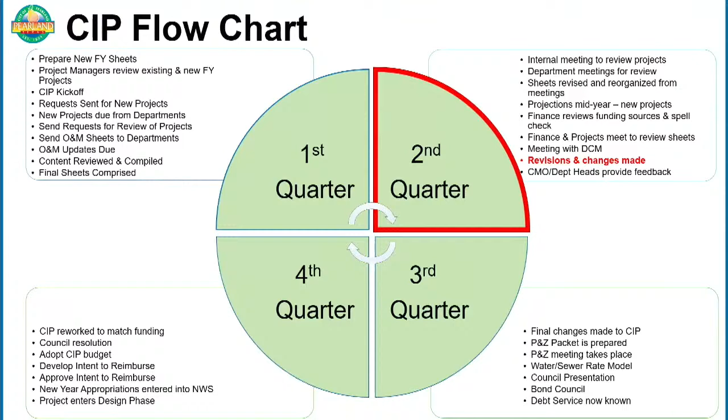So again, this is the first CIP update series for transportation and drainage for calendar year 25, which will follow with the CIP workshop. And then the next CIP update series will be over parks and facilities. At this time, I'll turn the presentation over to Rachel Winslow, head of the Office of Management and Budget, to talk about CIP budget approval and associated impacts.

Thank you. Good afternoon, Mayor and Council. So our annual CIP approval process begins with CIP approval, which was on September 9th. And this approved the projects for the current fiscal year. On October 14th, the intent to reimburse for fiscal year 25 was approved. This approves expenditures up to the amount shown for fiscal year 25, but individual contracts are still approved by Council.

In May of 2025, we'll have our fiscal year 2025 debt sold, which will impact the fiscal year 2026 debt rate. At the time of the debt sale, we'll be presenting an updated debt impact, and we will present an additional one at the CIP workshop in June. Changes made to the fiscal year 26 capital improvement plan will impact the fiscal year 27 debt rate.

Our O&M costs are built into CIP projects and included in the budget year of initial operation. Operational costs are considered in the multi-year budget forecast as well as the rate model.

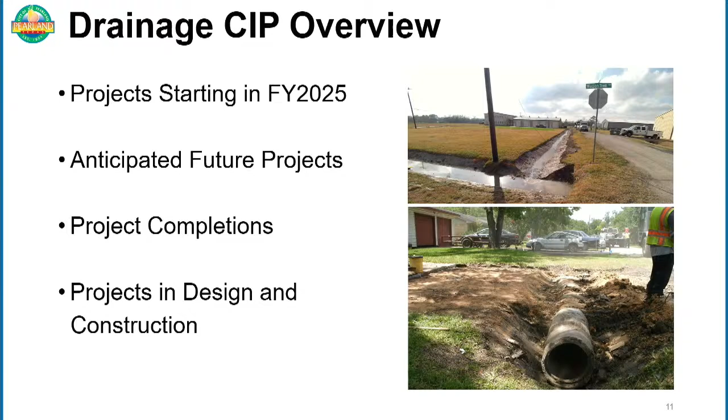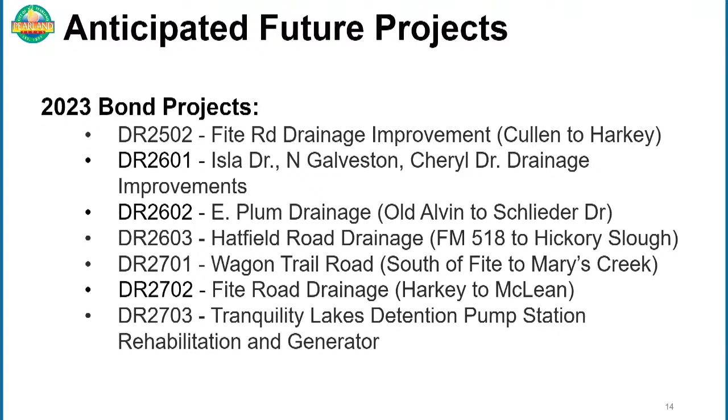From the anticipated future projects, I would like to highlight the Fite Road Drainage Improvement Project, with limits of work from Cullen Parkway to Harkey Road. Although this project has funding approved for fiscal year 25 to start design, we cannot construct it until TxDOT addresses the drainage issues on FM 1128. Otherwise, the drainage intent of this project will not work due to potential bottleneck downstream.

Currently, TxDOT has an active project to widen FM 1128 to include drainage improvements from FM 518 to Mary's Creek. The design is in its early stages, but we have been coordinating closely with TxDOT. Once TxDOT completes their drainage improvements, this project's scope can be reduced, significantly lowering the cost of the Fite Road project for the city.

Still on anticipated future projects, I would like to highlight the Isla Drive, North Galveston, Cheryl Drive drainage improvements. This project will include the removal of the existing concrete road, asphalt roadway pavement, roadside ditches, and replacement with the city standard concrete curb and gutter roadway with underground storm sewers.

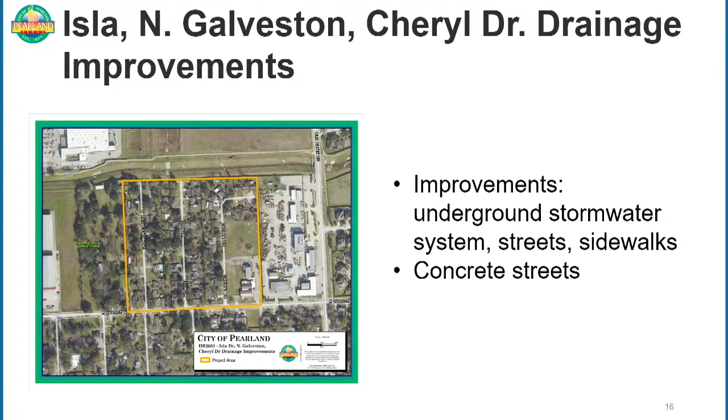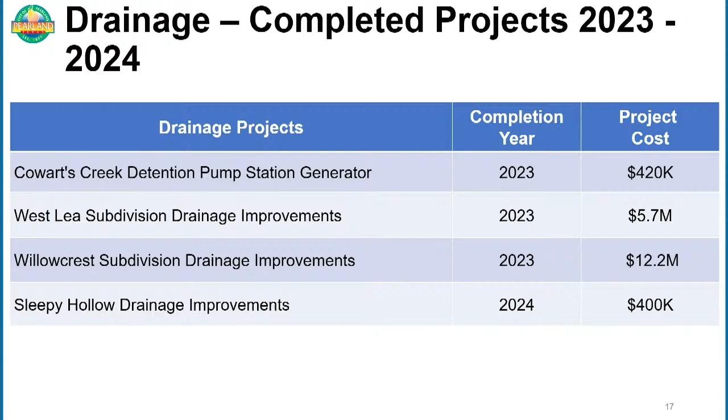Here's one project I would like to highlight, the Cowart's Creek Detention Pump Station Generator, which was completed within budget in 2023.

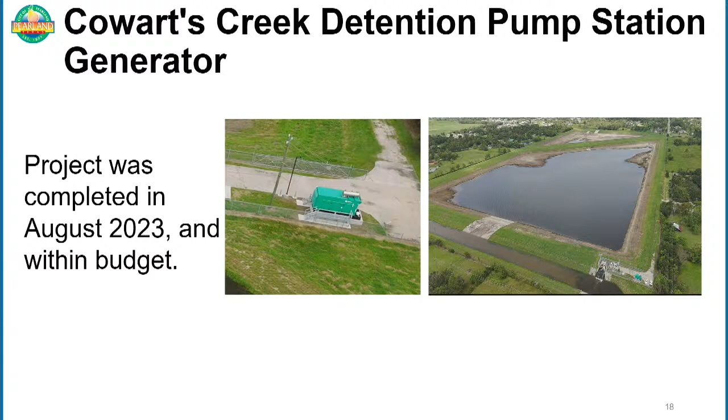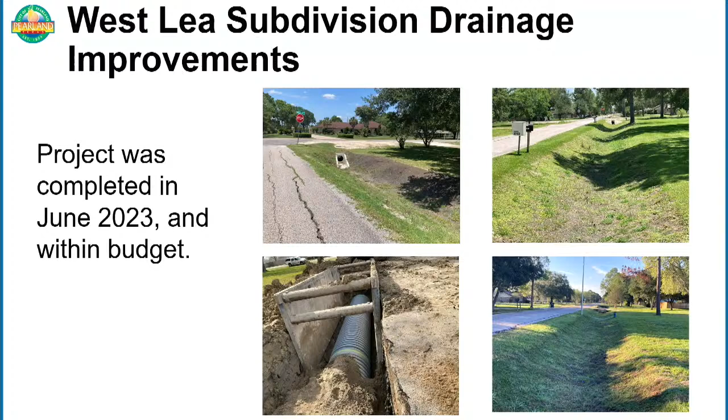Another project to highlight is the West Lea Subdivision Drainage Improvements, which was completed in mid-2023 and on budget. Council, as you are aware, the city is planning on addressing the roadway needs in this subdivision this year. Here are some pictures during and after construction of the drainage project.

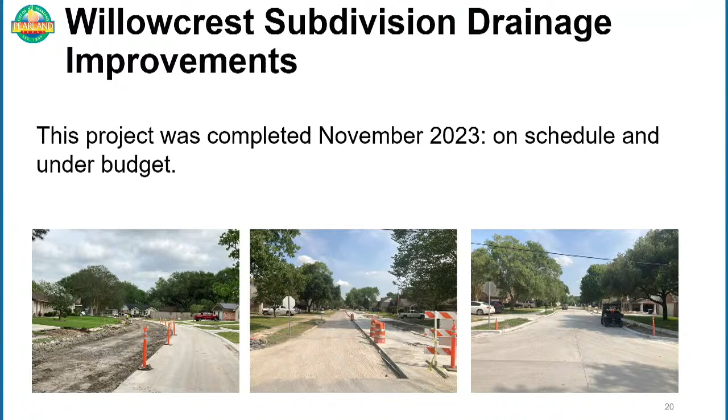Here's another project completed at the end of 2023, on schedule and on budget. And here are some pictures during and after construction.

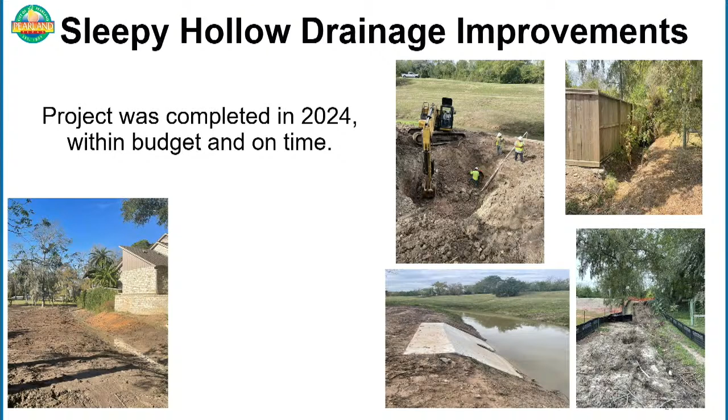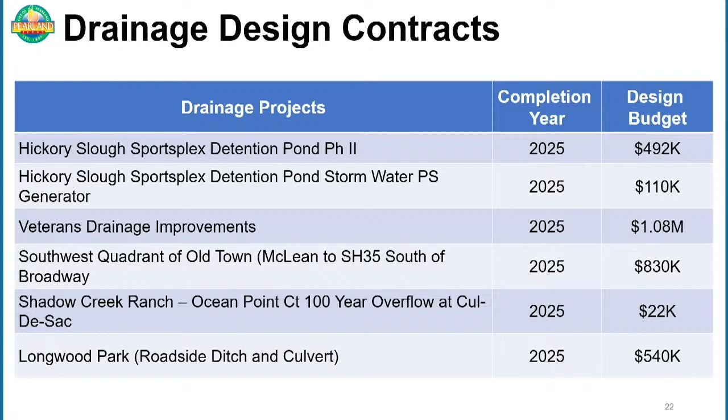Some of these projects have been combined with others to better allocate resources by designing and constructing together, minimizing impact to residents. By doing this, we are in and out of a neighborhood at the same time, as opposed to having separate projects constructed separately and inconveniencing residents multiple times. For example, the Hickory Slough Sportsplex Detention Pond Phase 2 and the Hickory Slough Sportsplex Detention Pond Stormwater Pump Station Generator were combined with the Hickory Slough Sportsplex Phase 2 Parks Project.

Out of the projects currently under design, I would like to highlight the southwest quadrant of Old Town drainage improvements, which will include regrading of the roadside ditches and road pavement improvements. This is one of the projects I mentioned earlier that was combined with other projects to better allocate resources and minimize inconveniences to residents. This one was combined with the water line project.

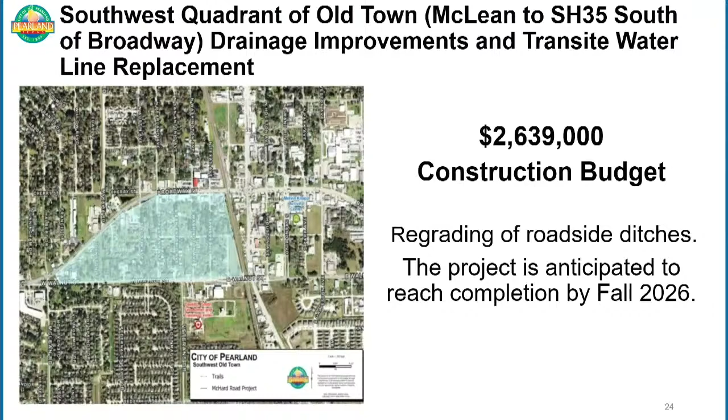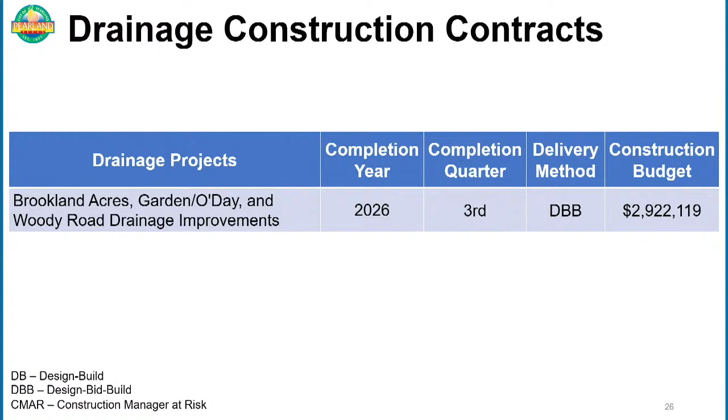We currently have a few projects in construction. These projects also have been combined into one, as you see here on the screen. These are funded by GLO. These projects are estimated to have construction complete in August of this year.

As I mentioned, this is another GLO grant funding project. Construction is going well so far.

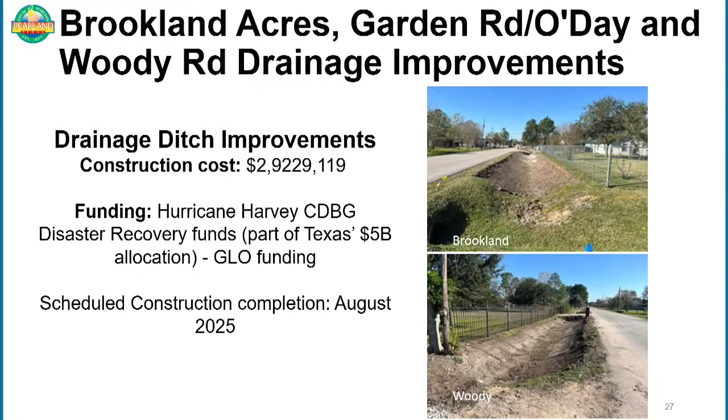At this time, I will pass the presentation over to Mr. Eric Heyman, Assistant Director of Public Works. Good afternoon, Mayor and Council, and thank you for another opportunity to highlight our drainage maintenance program since the last time we had this discussion.

As a quick reminder of why drainage maintenance is important, we see that impacted storm sewers could lead to downstream flooding, property damage, habitat loss, sanitary sewer overflows, contamination, as well as erosion. However, through routine and targeted maintenance activities, as well as our capital improvement projects, we believe that we can reduce the impacts of flooding within our community.

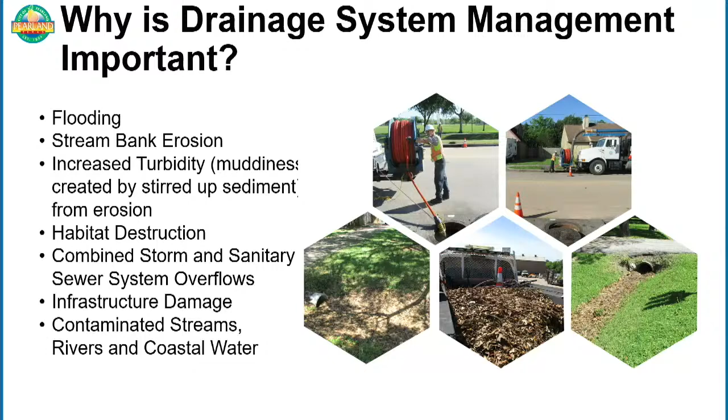And we have over 13,800 inlets. Each of these is a critical asset. It can also be a point of failure. It can also be a location for debris and sedimentation to obstruct and cause issues to our flow.

The team continues to inventory the drainage infrastructure throughout our program. Since we commenced in April of '23, based on ongoing inventory activities, we've increased our open ditch system inventory by 7.5%, and we've increased our enclosed system by 16%. So we continue to watch the asset grow.

In addition to the assets we previously highlighted, the city currently maintains 110 FEMA buyout lots. We inspect over 300 detention facilities comprised of both private and public ownership, provide grounds maintenance activities to 750 acres of drainage and buyout property, and as well provide all the emergency response support as it relates to the drainage activities.

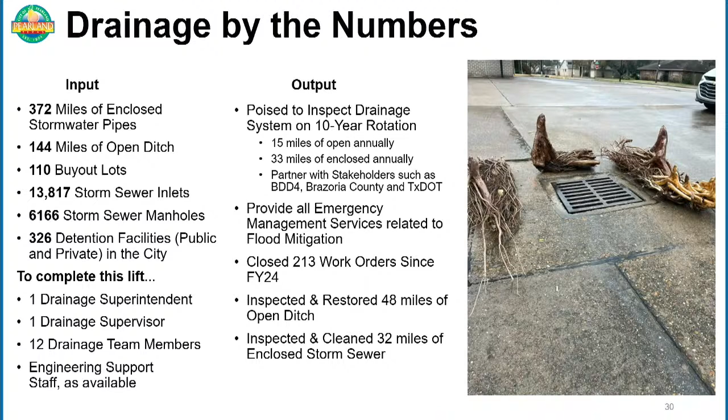Prior to fiscal year 23, we merged the right-of-way and streets and drainage division into a single division. In total, only 6 employees, inclusive of the supervisor, were assigned to drainage-related services.

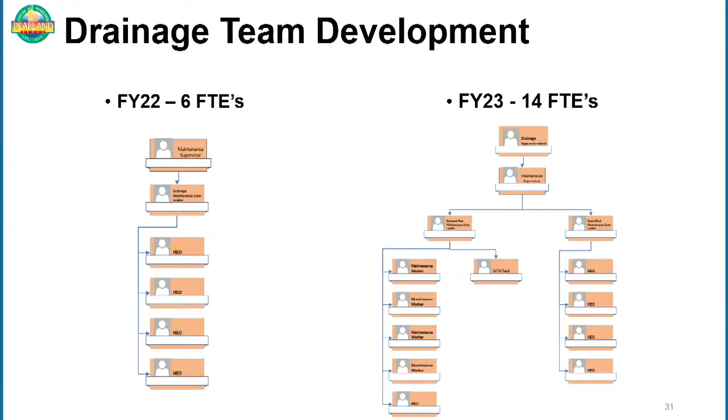However, in response to a need for increased drainage activities, council supported a recommendation to increase staffing levels and develop a new standalone drainage team, along with all of the critical assets and equipment necessary to ramp up this service. That support includes the addition of 7 drainage team members, bringing our current staff total to 12, as well as a superintendent and a supervisor to focus on leading that charge and helping coach, mentor, and direct staff.

The result of the program-based approach and desire to advance systematically throughout the community: staff proposed to inspect, clean, and reestablish flow lines as necessary on a 10-year basis. Year 1 commenced in Zone A with the team working counterclockwise throughout the community. While there remains some residual work to complete in the first zones, the team is working to bring those areas to conclusion with both in-house and contractual services.

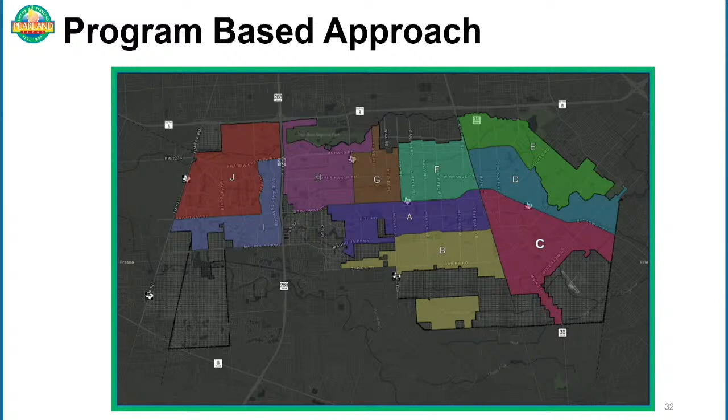Moreover, they show that new and aged infrastructure are both impacted by sedimentation, which is why it's important to have this program-based approach. To paint a full picture of the work that occurs, staff first visit an area and ensure design flow lines have been maintained based on culvert elevations.

In some cases, we do have very quick wins. In other cases, there are larger, heavier lifts that require a little bit of additional staff time to complete and do a good job.

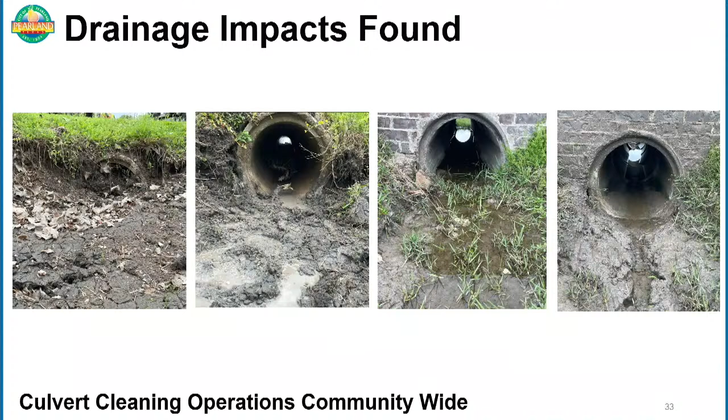Another example of this critical service includes the cleaning of our storm sewer manholes. We shared previously an asset inventory, and there are approximately 6,166 of these storm sewer manholes within our network.

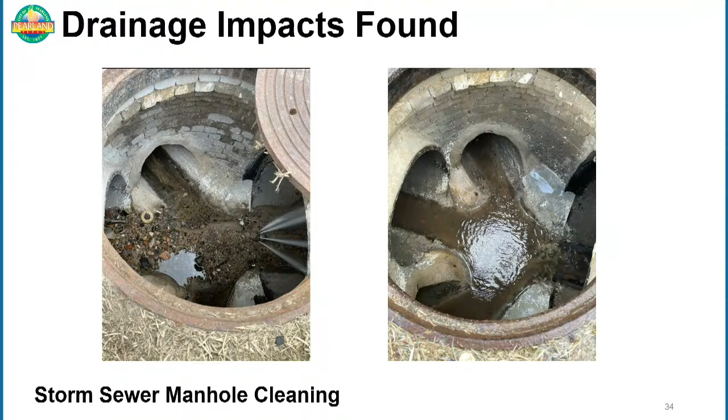Each of these serves as a point of entry for staff, as well as a point of accumulation for debris as it enters the inlets, moves throughout the pipes, and then congregates around obstructions where these flows meet. So they often require jetting by the staff, vacuuming, and at times personnel to enter these manholes and physically remove this debris by hand, as you see here.

Upon staff arrival, the team identified that we had localized flooding. The inlets were found to be clear and free of debris, but upon inspection, the outfall behind those homes had minimal water movement through the piping system, which led staff to determine that we had an obstruction. We dispatched our combination cleaner truck to come out and jet the lines, and on a blue sky day, much like we have today, we're able to go back out and dispatch our CCTV camera to see what was actually causing the obstruction.

Was it a sports ball? Was it leaf litter, old newspaper, or just an accumulation of 50 years of debris from within this community? We're excited to get that camera in there and see what's really causing the issues.

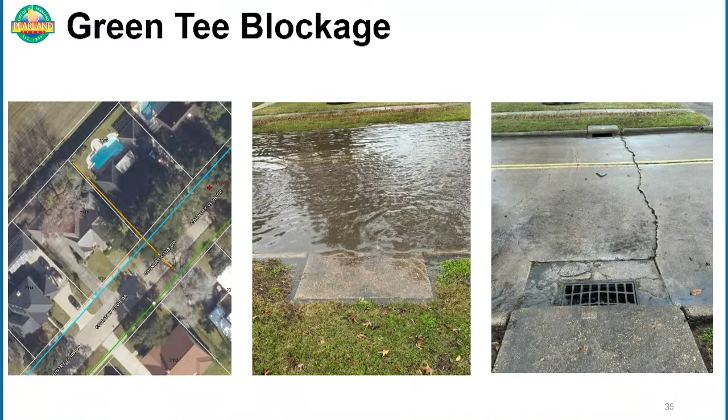To reduce impacts to our residents and coordinate work activities, our street team and drainage team often work hand in glove. In this instance, Garden Road was being repaved, and upon inspection of the storm sewer near the roadway, it was determined that an existing metal storm pipe was found to be in disrepair, causing subsequent failure to the road.

While we don't know exactly when that metal pipe was installed underneath the street, we do have imagery dating back to 1978 indicating that the drainage system intersected where this culvert was located.

So the drainage team removed the old aged infrastructure, installed new infrastructure which meets our design criteria, and prepped the road for rehabilitation, which has since occurred.

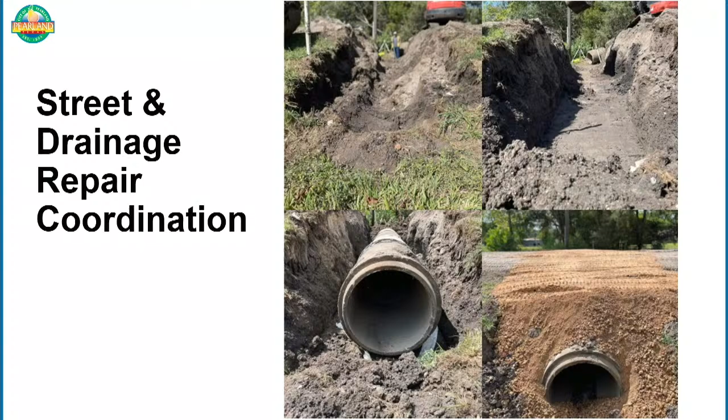As we touched on briefly, the city leverages contractual services to augment our in-house staff capabilities. As we monitor the program and staff capacity, contractual services aid in supplementing performance impacts caused by intermittent staffing challenges, weather delays, as well as priority conflicts, such as those non-program work activities that we shared previously.

In April, staff intend to present an open ditch maintenance contract for award with Texas Drainage, a previously effective contractor and a highly valued contractor who helps us make sure that our service levels and our metrics are in alignment with the program and help supplement staff activities.

Additionally, after a successful pilot project in 2023, City Council also awarded a contract with National Works for outsourced cleaning and inspection of the enclosed system. That contractor actually ramped up services this past week. They're out on Magnolia Road, and they're helping to make sure that all of our enclosed system is cleaned and safe and operable as we need it to be.

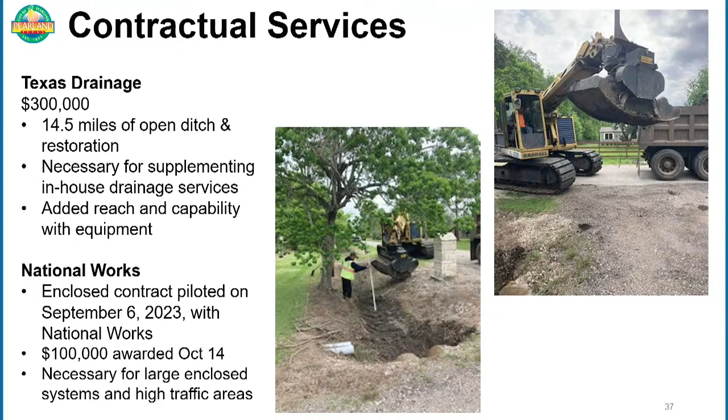As we begin to close out, we offer this snapshot in time from earlier this month of the team's completed services within the community. Keep in mind that while we operate from a program-based approach, we currently manage work orders that are submitted outside the program zone, but addressed as prioritization requires.

The team has developed an analysis tab on our public dashboard. You can find this on our drainage page online, which includes all of our metrics and monitoring. We are well beyond our target for our open ditch maintenance system, and we're approximately 50% through our enclosed system forecasted to this point. That said, please recall that the enclosed system contractor was anticipated, budgeted for, contract secured, and is out in our community right now.

Additionally, I'll add that one of our next steps on this dashboard is to begin to capture the drainage activities done by our CIP team to make sure that those are illustrated here and count towards those metrics. Ms. Fabiola just did a great job sharing some of the completed drainage work that their team have done, and we need to make sure that we memorialize that here.

I'll point out again that the team continues to identify new assets as we continue our inventory service and work to balance our community needs with work orders and requests.

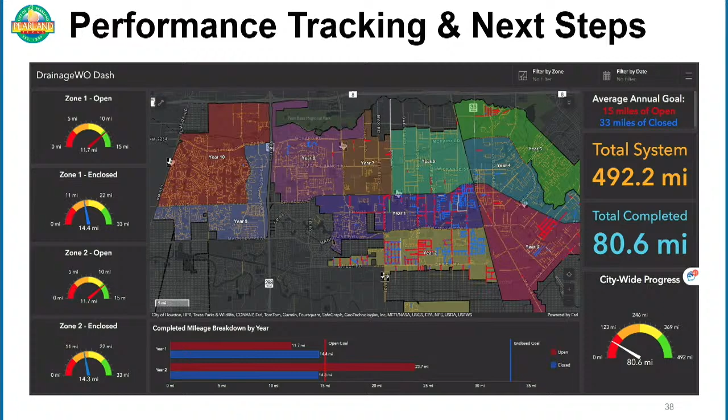And finally, I'll close with reminding those online and those here in the room, that the dashboard is alive and available to anybody who chooses to look at it. It's under drainage services, and you can find all kinds of key updates to the drainage program and activities.

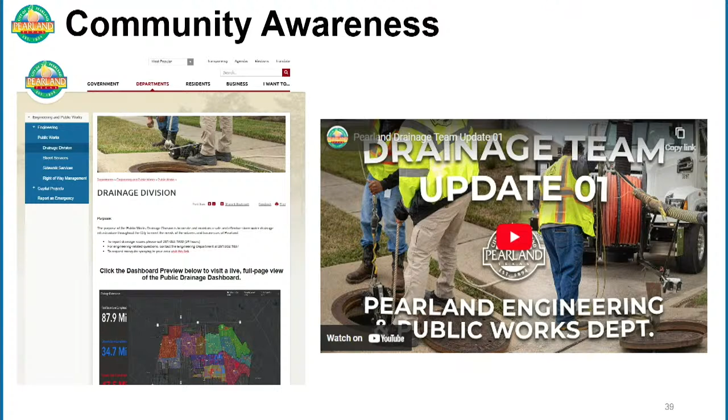So with that, I thank you for your time, and we'll turn it back over to Mr. Epperson for closeout.

Nothing further, Mayor. Be happy to entertain any questions at this point. Sounds good. We'll go to council for questions, comments.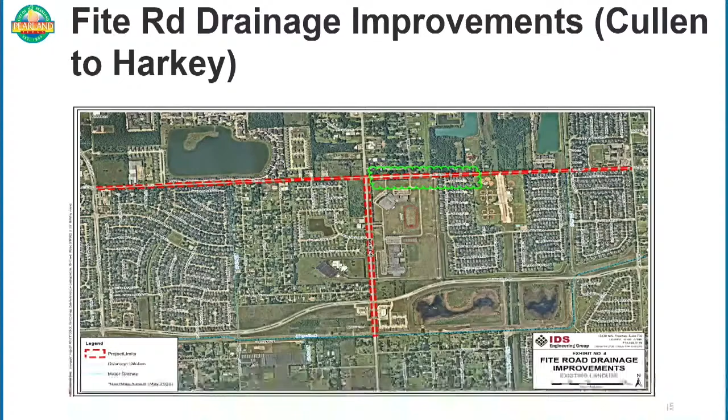Okay, and the first question—working with BDD4 and using their facilities, not just for this project but in all our projects, is that right? So we typically will rely on engineering. If we can coordinate with BDD4 to use whatever capacity they have in their facilities, we will. If we still have capacity in any of our detention facilities, we'll utilize that also.

Excuse me, Councilman, can you word the question again? I'm a little confused about the BDD4 part, and I can explain the TxDOT project too. But so their engineers and you guys are working together, BDD4 and our drainage?

Yes, when we conceptualize the project, we always reach out to them, because whenever our project outfalls into their system, we need to get their approval. They have their own requirement. Although we are the floodplain administrator, they manage their ditch system and want to see no impact with the ditch, so we always coordinate with them.

I want to address the front part. TxDOT has a project to widen FM 1128 from Broadway all the way to Bailey Road. When they do that project, it will address the main drainage issues along FM 1128. That's the major portion that would cost a lot for us to improve from Fite Road to Mary's Creek, because we'd have to install big boxes to take the flow from that intersection all the way to Magnolia. When TxDOT takes care of that, it will address the majority of the issues, and the rest will just be ditch regrading from east and west to that intersection.

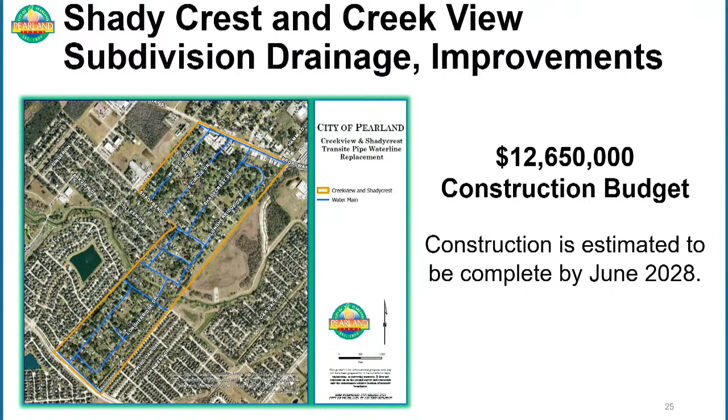So that's the overhead picture of it. Slide 23 had the design on the project started, and I can double check, but I believe slide 23 is the completion of the design.

We're under design right now, right? Yes. Okay, so that's the design completion date and the construction completion date, I believe it's 2028, June 25th. So roughly what are we looking at for design completion in 26?

Latter part of the year, two months from now? What's the timeline on that? I do have it, I just don't remember off the top of my head, but I can get that and pass it along. Yeah, that'd be fine.

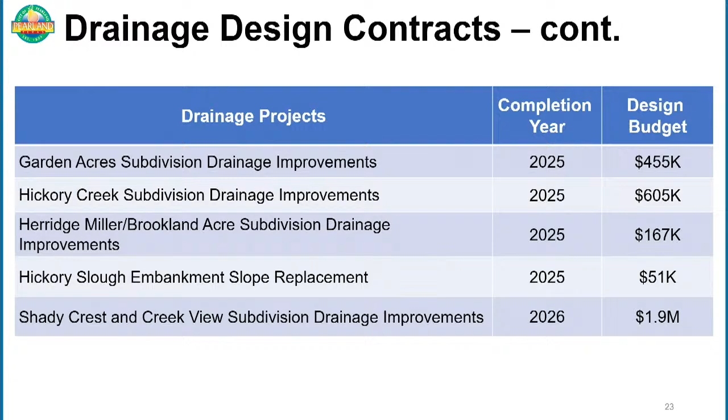And then final question, Eric, on our project to clean up the ditches and drainage and stuff. How's that coming along since we've got everybody hired and we got all the tools and trucks and everything going?

Member Koza, we seem to be moving along very well. We believe we laid a solid foundation. This past year the team really set the cornerstone, and that program is now off and running. We've had some learning opportunities, we know where our strengths are, and we know we're going to need to continue to leverage some outsourced services, but we believe we've got a good handle on it. Our colleagues in GIS do a great job always adding to our technology.

That helps us remain transparent, which you'll see on the dashboard again at your convenience. So we're excited about all the new levers we can pull to help us better forecast our budgets each year. The team recently pushed out an opportunity to quantify the amount of drainage assets in each program year, so your budgets now will mirror better what's truly needed within that dedicated zone, instead of just year over year what we've always done. We want to base those budgets on what our needs are.

So we're excited about that. In the future, we'll be able to distill that down to the subdivision level, where we'll look at individual programs specific to a subdivision to know exactly how much infrastructure is within the confines of that perimeter fence. We've got a great team in place and are looking forward to next year.

Okay, so the 10-year rotation's looking like something that's doable? Oh, yes, sir, we believe so. We're going to continue to monitor and measure, and we'll let you know, but we believe so.

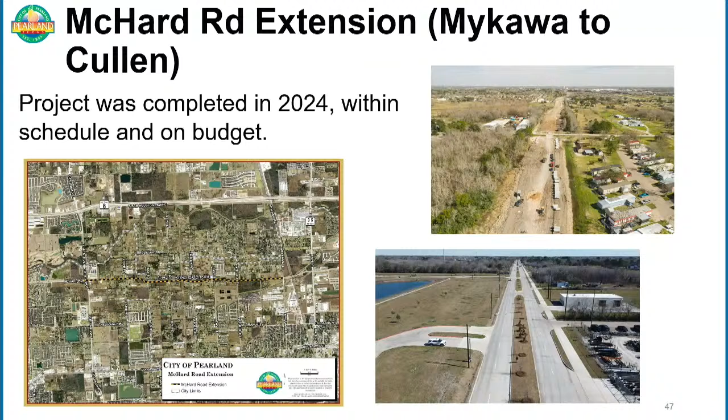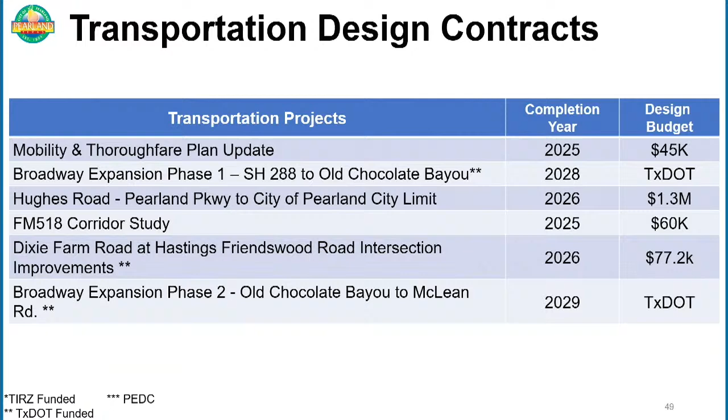The Broadway expansion Phase 1 and 2, and Dixie Farm Road at Hastings Friendswood Road intersection projects, have federal funding through TxDOT as well.

Out of the projects under design, we have some big projects such as Mykawa Road Widening, which includes construction of approximately 3 miles of a 4-lane concrete curb and gutter divided boulevard section roadway, including storm sewers, detention pond, traffic signals, landscaping, and a 10-foot sidewalk.

We have been in close coordination with the city of Brookside Village, and they have been very helpful through this whole process, especially with the land acquisition process that is required to complete this project. This project is approximately 70% design complete.

This project has an advance funding agreement with TxDOT, who administers the federal funding through the Federal Highway Administration, and TxDOT will be managing this project. This is expected to start construction in January 2028 and be completed in January 2030.

The AFA agreement executed in 2017 is an 80-20 split funding participation, which means the city will be reimbursed up to 80% of the construction cost agreed in the AFA.

The most recent opinion of probable construction costs provided show a significant increase in construction costs, and the city has recently submitted a request to H-GAC to consider an increase in funding participation. If approved, an amendment to the AFA will be needed, which will be presented to council for consideration.

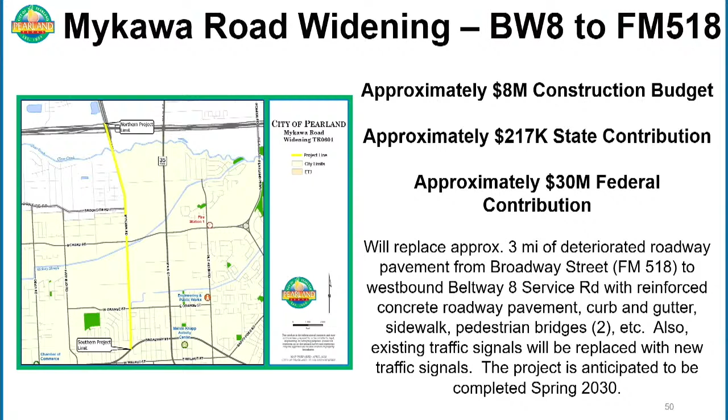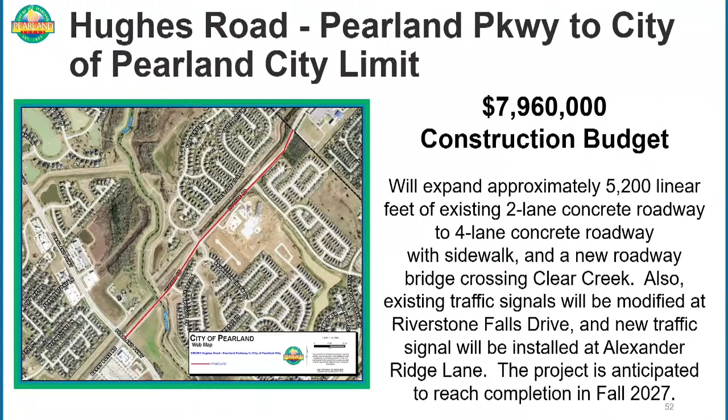The Hughes Road, Pearland Parkway to City of Pearland city limits project has recently started design, although it's too early to have a definite date for completion. We estimate this project to be completed by fall of 2027.

Switching from design to projects that are currently in construction, you will notice the completion quarter for the concrete sidewalks and replacement project shows active because this is an ongoing construction project across the whole city. Public Works Division will provide additional details on this later in the presentation.

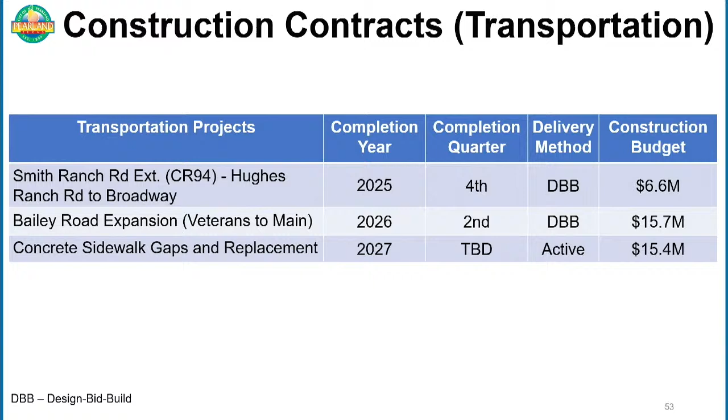The Smith Ranch Road Extension project is currently under construction and progressing well. Construction is expected to be completed by later this year.

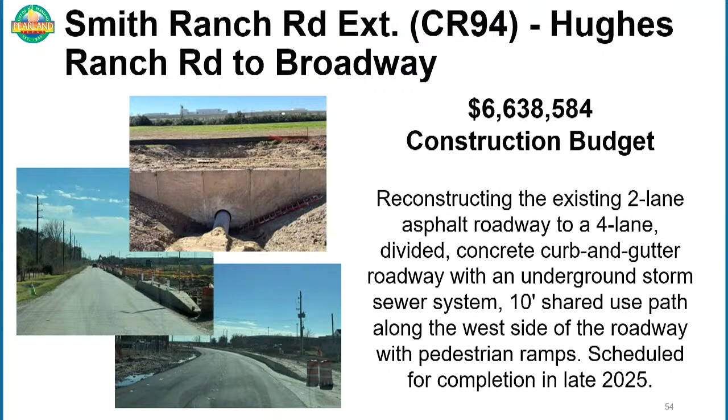The Bailey Road expansion construction is ongoing and progressing well. This project included expanding the existing 2-lane to 4-lane roadway and a new roadway bridge crossing over the Burlington Northern Santa Fe Railroad. Current construction schedule indicates this project will attain substantial completion by September of this year and final completion by December. This means this project has the potential to be complete well before the original schedule, which was spring of 2026. Council, this concludes the CIP projects update.

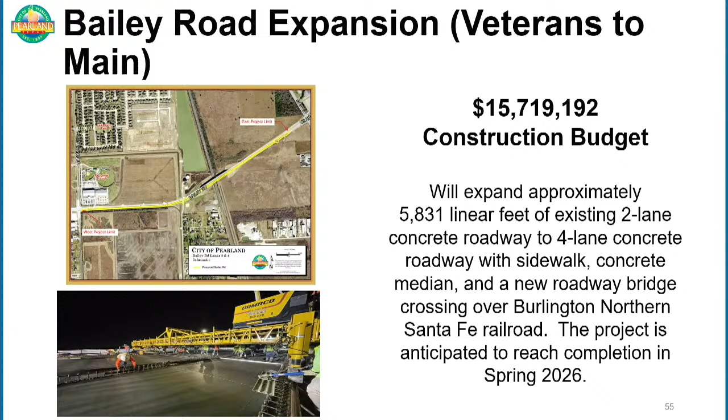The City of Pearland's Traffic Operations Department plays a crucial role in maintaining and improving the safety, efficiency, and mobility of our transportation system. Our department oversees a wide range of elements, including traffic signals, school zones, communication system components, street signs, and other infrastructure. Our department ensures the smooth flow of traffic, reduces congestion, and enhances the overall quality of life for our residents.

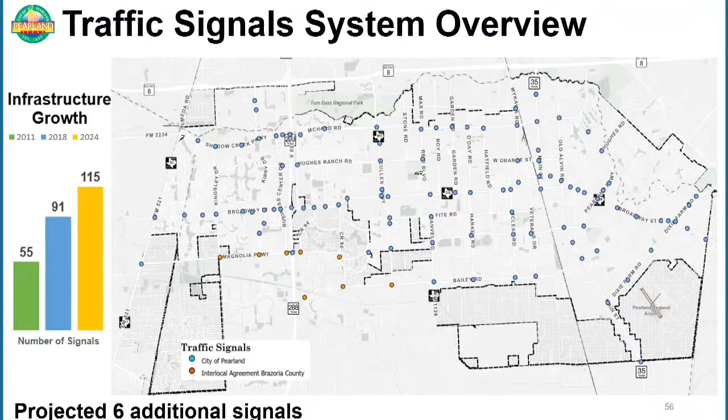Our traffic signals infrastructure has grown from 55 signals in 2011 to 115 traffic signals as of today, which includes 10 traffic signals covered by our Brazoria County interlocal maintenance agreement.

The daily maintenance of our traffic operations includes troubleshooting several internal components in the traffic signal cabinets, field hardware, school zone flashers, as well as repairing damaged streetlights and converting them to energy-efficient LED fixtures. Last year, we also inherited the maintenance of street signs, which involves installing and repairing signs along city-owned streets. Additionally, at the request of our Facilities and Parks Department, the sign crew now oversees parking lot pavement markings.

Beyond our daily maintenance tasks, we are working on several projects, including short-term projects that include implementing traffic calming measures based on residents' requests. Midterm projects involve installing flashing yellow arrows at several intersections, overseeing the rebuild of span wire intersections, and replacing outdated traffic signal equipment, such as traffic signal cabinets and detection systems.

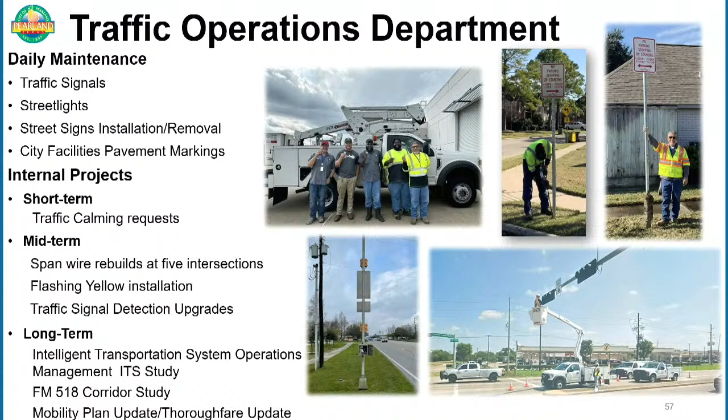In the long term, we are beginning phase 2 of the Intelligent Transportation System Operations Management Study, ITS for short, which will guide us in the allocation of staffing and resources necessary to manage and maintain the city's infrastructure. In addition, the Pearland Mobility Study and the FM 518 Corridor Study are each 90% funded by the Houston-Galveston Area Council and 10% funded by the city. The results of these studies will be presented to council in May 2025.

The Traffic Division manages the Traffic Calming Committee, which includes city staff from engineering and public works, police, fire, and a consultant professional traffic engineer. The traffic policy is outlined in Ordinance Number 1301-1, which is based on the Texas Manual on Uniform Traffic Control Devices, or TMUTCD. Meetings are held monthly, and typical requests include concerns such as cut-through traffic, speeding, requests for stop signs, speed bumps, and signal warrants.

The complete analysis typically takes around 45 days depending on the type of request. One frequent request is to lower the speed limit on residential streets. However, according to state law, the speed limit on residential streets is 30 miles per hour, whether a sign is posted or not. Therefore, the city does not lower speed limits on individual residential streets, but instead maintains a consistent residential speed limit throughout the city, in line with state law.

The Traffic Calming Committee addresses requests on a case-by-case basis, which has been the established approach for managing traffic issues in this area. However, if traffic issues in a particular area are higher in number, frequency, or concentration than the rest of the city, the committee may recommend a comprehensive traffic study.

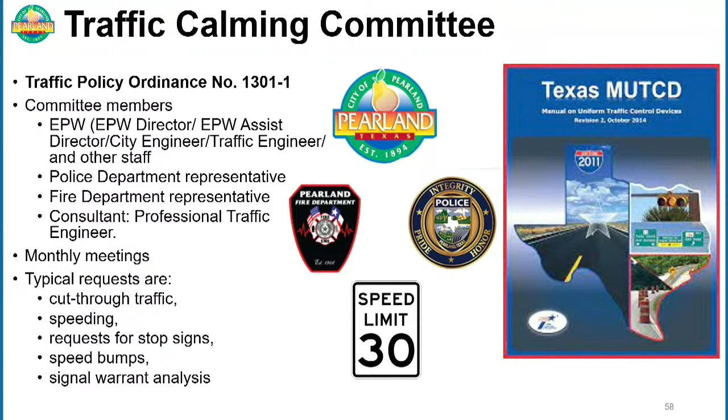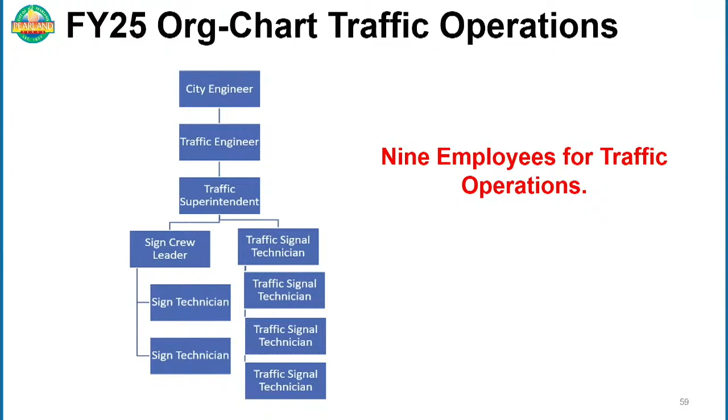The Traffic Division consists of 9 employees, 4 who are responsible for maintaining 115 traffic signals, and 3 who manage all signage on city-owned streets and pavement markings for the city and park facilities. With the anticipated growth in infrastructure, as well as the increase in demands for sign maintenance, pavement markings, and fiber connectivity within our signals, Phase 1 of the ITS study concluded that additional staff will be necessary to meet these growing needs.

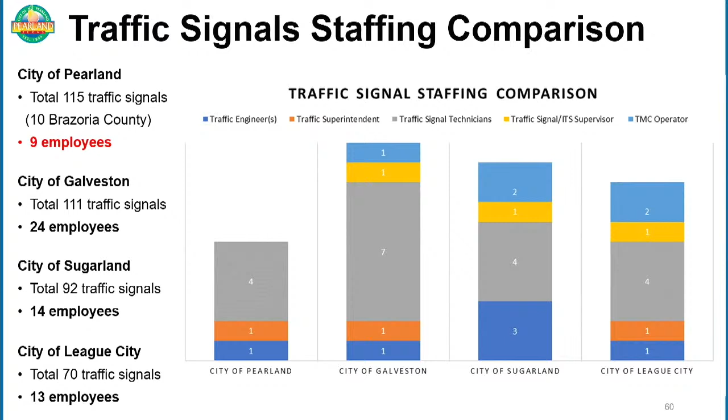Phase 1 of the ITS study in Pearland assessed the staffing needs required for safe and efficient traffic operations. Comparisons were made with the cities of Galveston, Sugar Land, and League City, all of which have similar urban populations. As you can see on the slide, the city of Pearland has the highest number of traffic signals, but the lowest staffing levels compared to other cities, making it challenging to meet response times and address traffic operation issues promptly.

Similarly, for traffic sign staff, the Phase 1 study made the same comparisons with the city of Galveston, Sugar Land, and League City. As you can see, the city of Pearland sign maintenance has grown from 13,468 traffic signs to 15,991 traffic signs.

This does not include the newly added subdivisions to the city. Additionally, the traffic sign crew has expanded its responsibilities by introducing new in-house services for pavement markings in parking lots for the city facilities and parks.

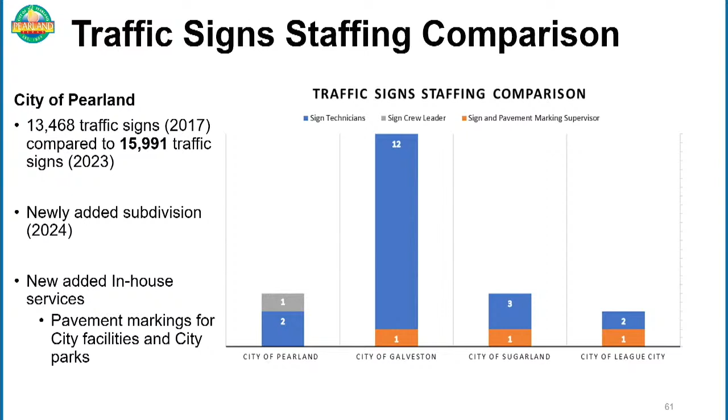The traffic division currently consists of 9 members. This team is responsible for the engineering and operation of the city's traffic system. Additional staff in the traffic operations department is essential to meet the growing demands and responsibilities associated with our operations. Additionally, team members are being requested based on the current workload and the city's needs, which is also supported and recommended by Phase 1 of the ITS study.

Adding a traffic signal supervisor will help reduce training demands and provide the necessary field presence. Hiring 2 additional traffic signal technicians will allow us to maintain more signals and ensure quicker response times for maintenance issues. Moreover, these additional team members will be crucial for visually monitoring problem sites and collecting traffic data.

Adding 2 traffic sign technicians will increase our capacity to install signs and maintain pavement markings. It is our vision that one crew could focus on signs while the others will focus on pavement markings. This will help us support our infrastructure.

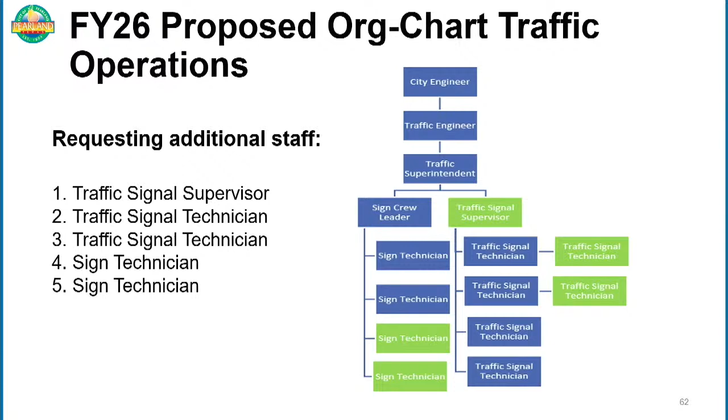The traffic division team has overseen the rebuild of 5 span wire intersections, has provided first response to emergency weather situations, and closed 680 work orders for signals and sign repairs. They have also completed streetlight repairs along SH35 and Cullen Parkway, as well as finished parking lot pavement markings for Tom Reid Library, and we are in the process of finishing the Pearland Recreation Center.

Additionally, the team has implemented traffic committee requests and deployed radar counters for several traffic studies. The Traffic Calming Committee has released several studies in the past year, including the traffic signal installation at Dixie Farm at Tall Oak Drive/Hastings Friendswood Road and the Sleepy Hollow traffic study.

A notable project is the 2023 Dixie Farm Road Bridge transition issues at Cowart's Creek and Mary's Creek. The study highlighted the need to modify the transition areas for each bridge. The CIP project was finalized last year, and crash data showed a reduction in crashes in the surrounding area for 2024 to 2025, with no reported crashes since the project has been finalized.

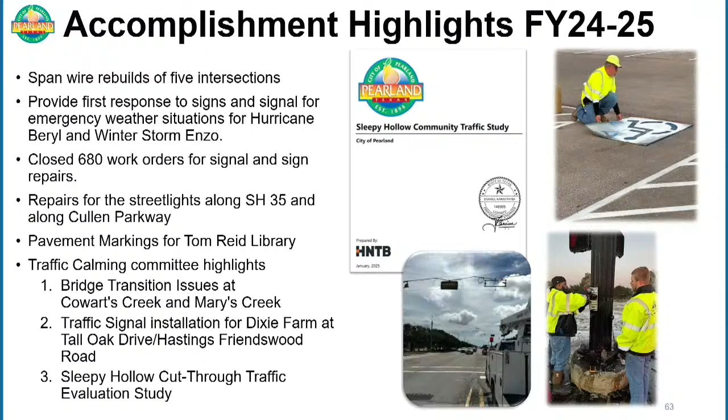Additionally, highlights include the completion of our Phase 1 ITS study and the installation of our latest traffic signal detection system, NoTraffic. The traffic detection technology has evolved significantly, and this new system incorporates AI capabilities, combining both camera and radar detection. The system enables us to manage and monitor intersections from our traffic management center, which helps with the optimization of traffic flow, improving safety, responding to incidents in real time, and monitoring special events.

It provides key performance metrics such as the level of service of an intersection, the number of arrivals on green and red lights, traffic counts, and real-time alerts.

To effectively monitor the 115 traffic signals, additional staff is required. This will allow the traffic superintendent, traffic engineer, and, in the hopes for a future TMC operator, to oversee the traffic management center.

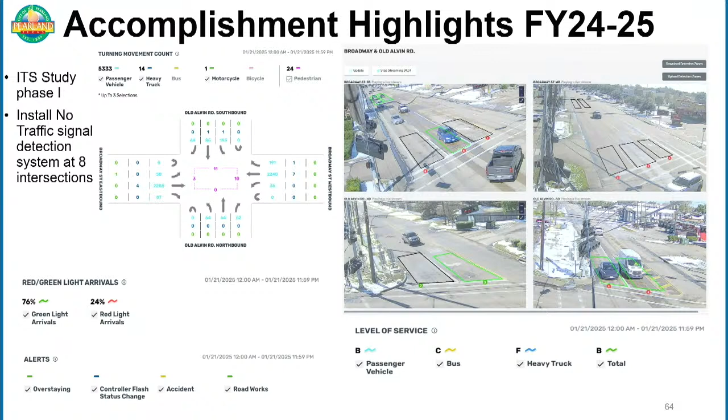At this time, I will turn the presentation back to Eric Hammond for the next segment of our streets update. Good afternoon again, and thank you for the opportunity to expand a bit further on our transportation network and maintenance programs. The image before you captures the current network of both our streets and sidewalk inventory.

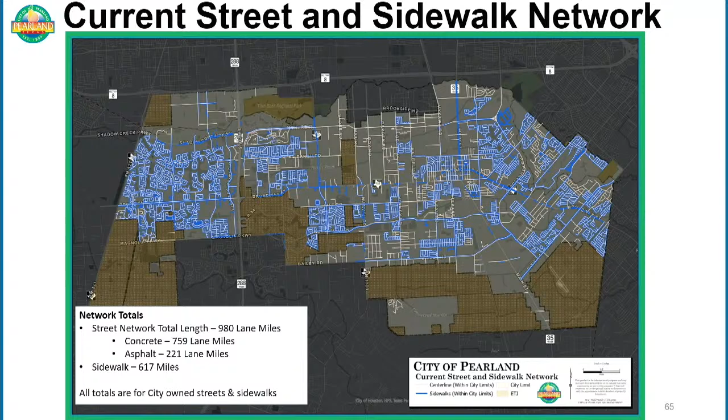Prior to FY25, there were 9 team members assigned and budgeted for to maintain the entire street and sidewalk network, one of which was a dedicated supervisor who managed the day-to-day operations, 3 team members solely dedicated to the 617 miles of sidewalk maintenance, and 5 team members dedicated to maintaining the 980 miles of asphalt and concrete streets.

As of the FY25 budget process, City Council supported the infusion of 5 additional team members to expand our road maintenance activity. The team members were funded at mid-year, and as such, positions have been posted, interviews are being scheduled, and staff are anticipated to onboard early April.

The main intent of these additional personnel is to expand our services and allow for routine pothole patching, concurrent with preventative services such as our crack sealing program. It is important to note that the sidewalk staffing levels remain static, with 3 team members solely dedicated to managing the city's entire sidewalk network.

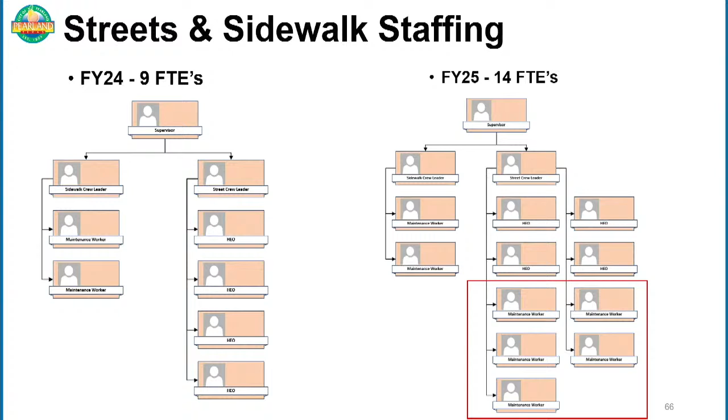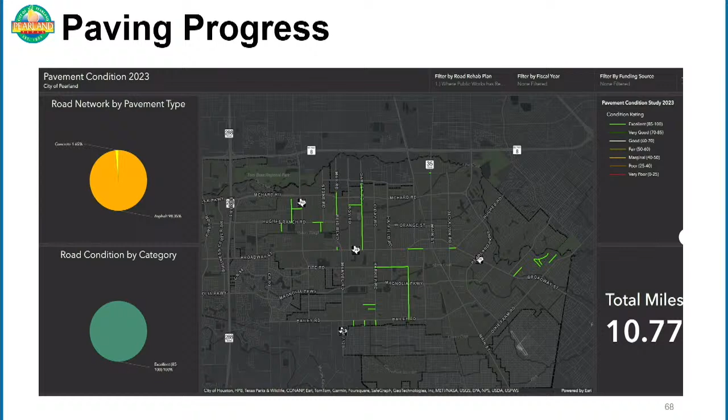Moving forward, the team intends to rehabilitate pavement on Veterans, Wagon Trail, Bardette, Raza, Woody, and Cherry, just to name again a few. This work package has been budgeted for and cooperative pricing has been obtained for these roads.

Currently, the team is evaluating that cooperative pricing based on recent discussions. After further review, and after we compare that to other cooperative opportunities and bid projects of the recent past, we'll look to recommend an award to council.

Should the cooperative pricing remain the best value, the team will recommend a contract with PaveCon for these roads. Currently, that's estimated at $1.3 million, but it will rehabilitate an additional 1.7 miles of roadway within our community.

Staff also intend to leverage outsourced services for localized base repair along Roy, Veterans, Old Chocolate, and Plum near the bus barn, in advance of the forthcoming interlocal paving agreement between us and Brazoria County.

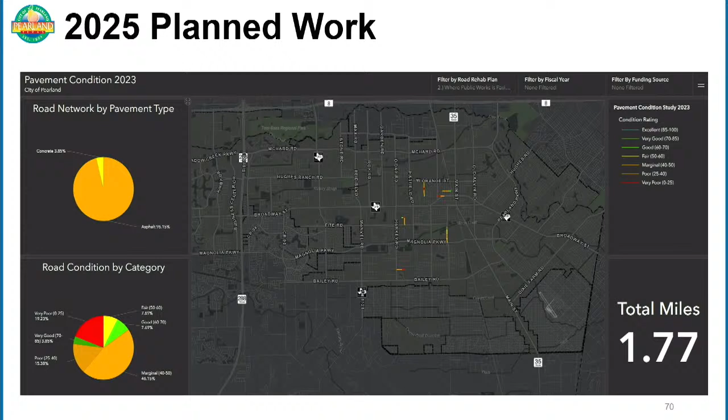And finally, it's the intent of the team, in conjunction with key stakeholders such as EDC, Brazoria County, and CIP, to improve just over 41 centerline miles of roadway within the next 5 years. This image illustrates the location of those planned improvements.

Again, this is all live on our interactive dashboard. It can be found on the streets webpage, and it illustrates the condition of each of the road segments based on our previous PCI assessment and all the areas that we look to improve over the coming years.

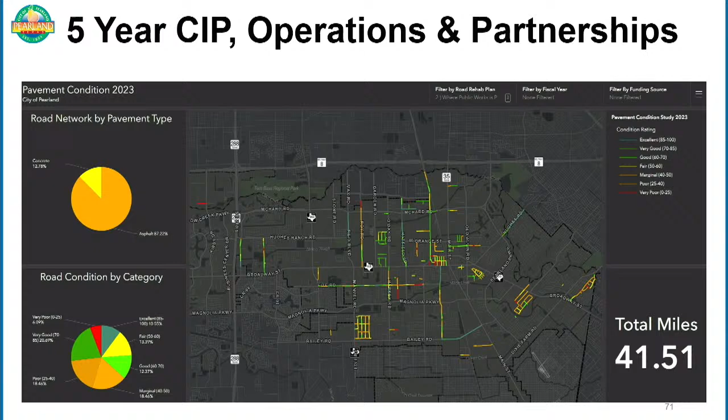Based on the 2023 Pavement Condition Survey, Infrastructure Management Systems suggested an annual budget of $5.9 million, and they indicate that that's necessary over the next 5 years to maintain a steady state PCI of 74. Based on our infrastructure and industry pricing averages, deviation from this estimated annual budget would negatively impact our PCI.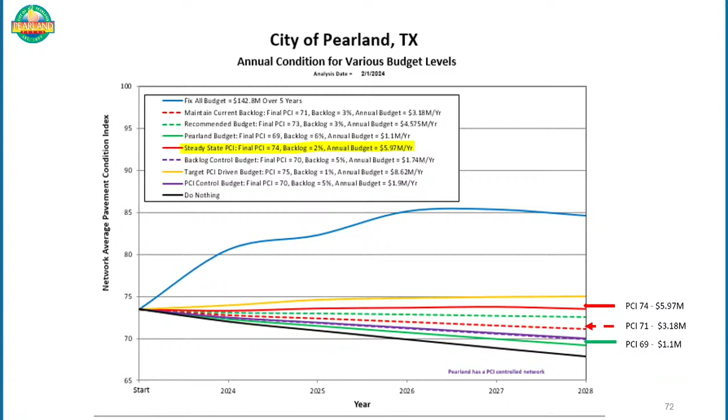Regarding asphalt street impacts alone, the 2013 survey indicated an overall asphalt PCI of 66, which has deteriorated since then by 11% due to deferred funding in the asphalt maintenance program. Should this trend continue, we would expect further decline in our asphalt network.

That said, I will add that the additional infusion from the past 2 years has helped us move the needle on those recently improved asphalt roads. So again, thank you for that.

To be clear on the capacity and services we provide compared to best practices, with the existing 5-member team, our current level of service typically circulates around pothole filling and localized asphalt level-ups. Although 5 additional personnel were granted to the division, those positions are funded at mid-year and will not be incorporated into the program until next month. With the additional personnel, staffing levels are still slightly unaligned with best management practices, which rely on an extensive list of services intended to prolong our public investment and the usability of our roadways.

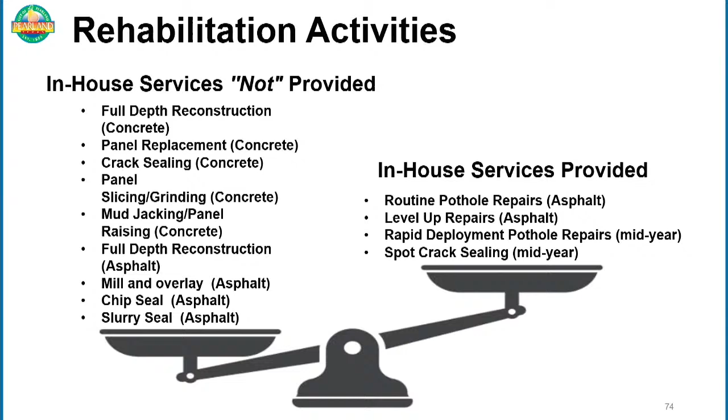We would again like to thank Council for the support in the first step of our multi-year approach to aligning crew, services, and capabilities with best management practices. Once on board in April, the new crew will allow for rapid deployment pothole patching service as well as our crack seal service. The team did develop a 5-year plan for right-sizing this operation and allowing a more robust service level closer to the left side of that previous scale.

The team desires to be expanded in FY26 with a concrete repair crew, for which currently there are no dedicated services and minimal contract dollars assigned, although 80% of our network is concrete infrastructure. Moving into FY27 and FY28, the team would look to recommend a second asphalt crew and then a second concrete crew, so that we can begin to split our community into 2 separate sections and manage work accordingly.

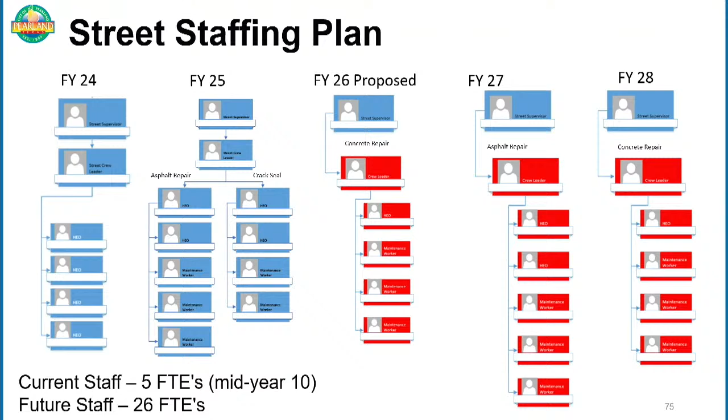It is anticipated that with an ongoing crack seal program, we will prolong the life of our road network, and a 4-member team is required at minimum to ensure we're providing safe traffic control as well as the service as intended. Similarly, as it relates to pothole work, the team provides pothole filling services on a daily basis, weather permitting.

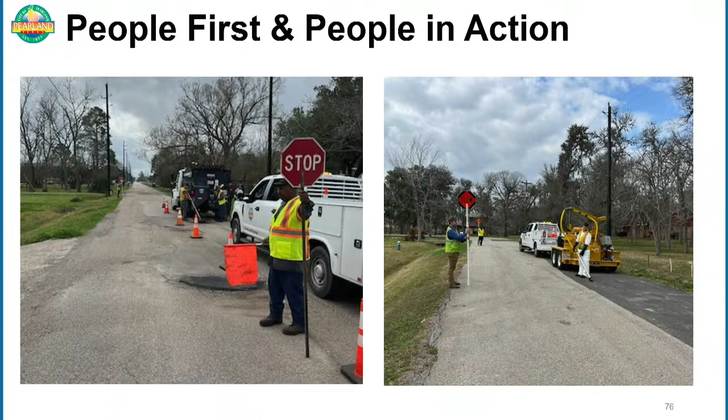That service is really contingent upon a 5-person team being here, which means that if there's sickness, illness, somebody out on vacation, those things, the crew suffers, the service itself suffers. So we're looking forward to getting new team members on board and building the necessary service levels and redundancy.

While service level advancements have been made since we last met, we would like to showcase 2 of those. The first is the team's desire to no longer simply fill potholes to mitigate individual depressions. In many cases, our pavement failures result in multiple potholes spanning one single localized area. Even after filling, and while safer to the commuter, the ride quality and the aesthetic are less than desired.

To improve on this, the team is equipped to provide localized skin patches covering multiple pothole patches in a single asphalt skin patch. While this is a more comprehensive repair and requires additional staff time, the result is an improved ride quality.

We've already started this operation throughout the community. Very soon you'll be able to see a short video published online on the streets page that speaks to this. We're excited to get this out and start making these strategic improvements.

The second improvement is to expand our program-based approach. The team can now see all potholes through our CityWorks work order management system. Now we can see those potholes and service requests overlaid onto our PCI data, which helps us more directly assign team members into dedicated zones, reducing travel time and improving areas of the community in batches, helping us work locally.

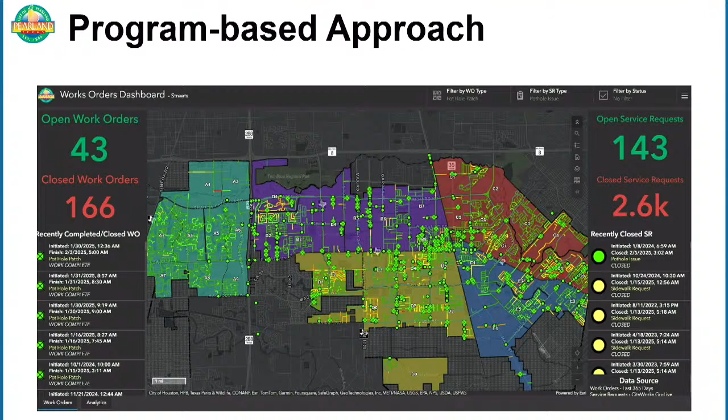This program still relies on the use of our pothole priority survey, and as soon as those new team members are onboarded, we'll have the necessary resources to get out there, assess the potholes, and make sure they're assigned, addressed, and mitigated post-haste.

Transitioning to sidewalks, earlier this month there were 943 sidewalk repair locations on our dashboard. Just over 650 of those were in high status and just under 250 were in medium status. To improve our sidewalk repair operations and reduce backlog, staff are currently targeting areas of high and medium risk submitted prior to October 1, 2024.

Since the sidewalk repair contract commenced in September, 55% of those work orders have been completed, with the balance anticipated to be completed by summer. Immediately upon completion of this first round, the team has the next batch of work orders that were submitted after October 1, 2024, and we'll be assigning those to our contractor for repair.

For background, in FY21 and prior, the city invested approximately $500,000 annually in sidewalk repairs. In FY22, until the adoption of the recent bond which included our gap sidewalk and mitigation program, the city invested approximately $900,000 annually. Since the adoption of the bond, which provided $15 million dedicated to sidewalk gap mitigation and repair, the team now has the opportunity to invest a little over $2 million in operations year one, and $4 million for the next several years.

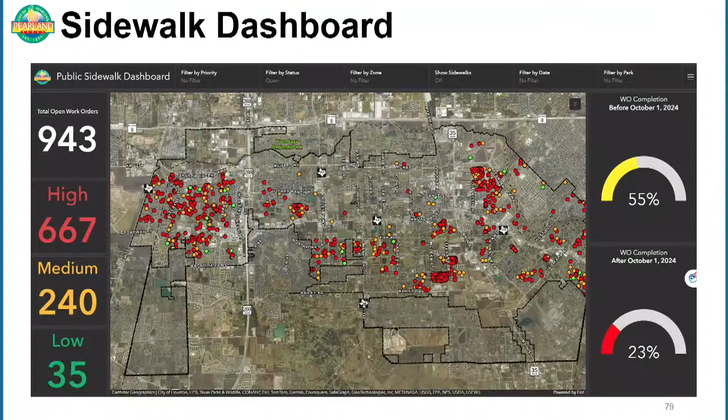In addition to a data-driven approach for sidewalk repair, the team also developed the same concept for our sidewalk gap mitigation program through the great work from our colleagues in GIS. There's a vast number of gaps in our pedestrian mobility network, and in order to focus, align, and prioritize those, our GIS colleagues helped us determine our schools, parks, and city facilities so we can begin a targeted approach to mitigate gaps towards those public destinations first.

That dashboard now leverages our PCI data, identifies the gaps within that buffer, and then allows staff to come out, conduct a field audit, and determine feasibility to connect between any of those local gaps, making sure we're having a targeted approach on where we're trying to mitigate gaps first.

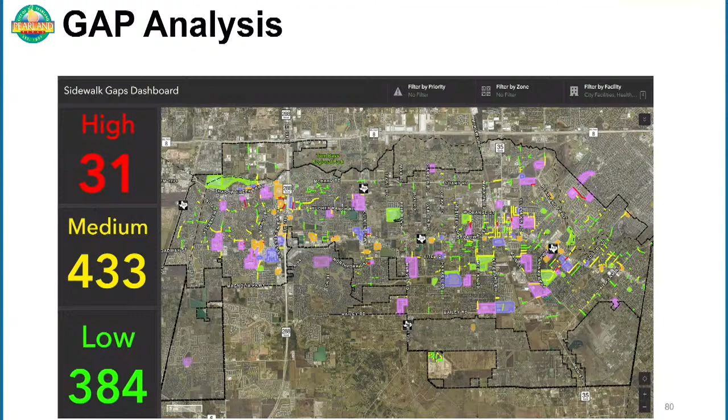Finally, we'd like to share that there are publications related to our street and sidewalk services, which can be found online on the streets webpage.

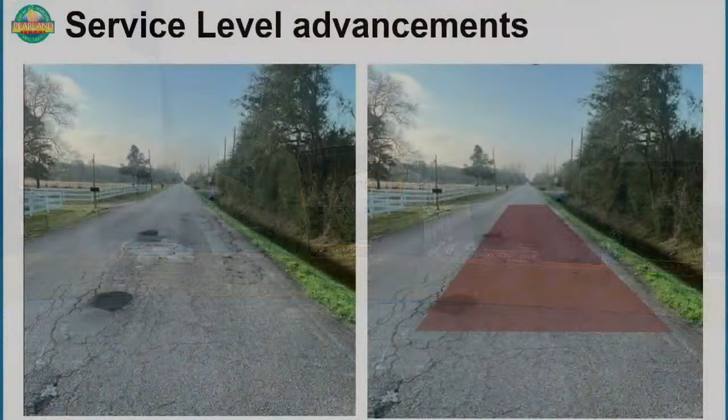So on the right, either picture, on the side, you see the actual ditch itself, Eric, the green part. I've been noticing some of our roads -- one of the biggest detriments to asphalt is water, right? And so if the water can't run off the road, it creates situations like this. I'm not saying this is a great example, but I've noticed some of our roads have grass built up higher than the road edge, which creates water pooling and then leads to potholes. Do we have -- number one, when we're doing this, are the guys looking for that to make sure the drainage is right, and do we have a way to grade off that edge, that roadway edge, so the water doesn't pool?

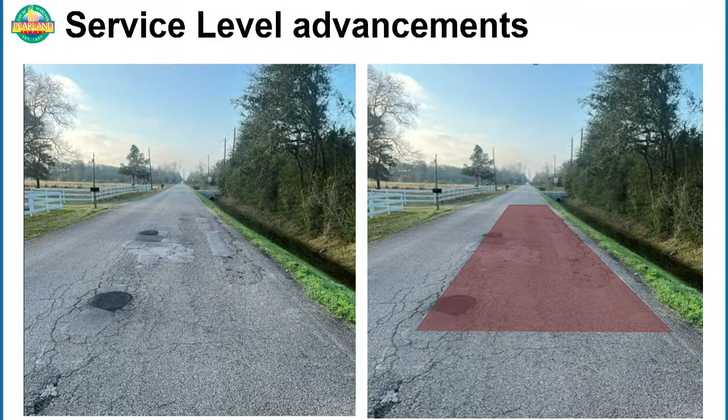Yes sir, we have a maintainer in inventory currently that we could deploy to do this. The team will look for this while they're out conducting pothole services. As we continue to scale up our operation and staffing capabilities, these are things we'll begin to add to the program to ensure a more robust maintenance program. Okay, thank you.

Questions, comments? Mayor Pro Tem? Thank you, Mayor. If you go back to slide 48, the Shadow Creek Parkway landscaping, street lighting, and sidewalks -- that's 740,000 just for design.

I guess my fear, and Matt probably knows where I'm headed, is the major design we paid for, and then the landscaping price tag that comes behind a major design that outlines all the work to be done. So can you expound on that a little bit more, and any idea on where we end up on construction costs?

Can I provide that information at a later time for you? Yeah, that's fine. And I realize it's funded by TIRZ, but still, it's tax dollars. Yep.

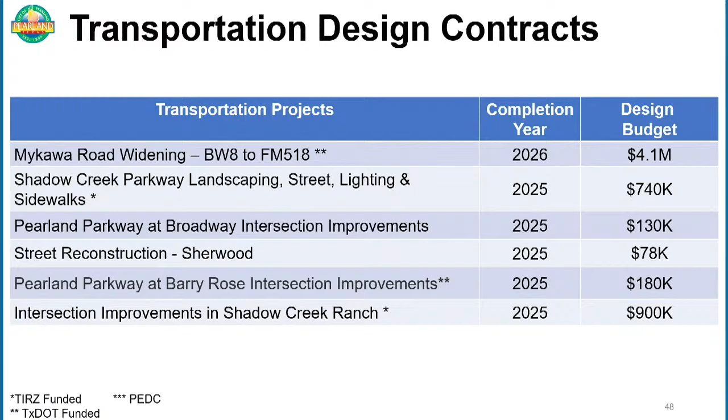And I'm sorry, I said 27 through 29. Does that apply to 26 also? Or does that start in 27? That starts in 27.

Okay, thank you. Also, with these numbers, as Member Chavarria rightly pointed out, we need roughly $6 million a year to maintain our current PCI.

Does that include what we're looking at here? Or we need 6, but we're going to spend 27 this year, and we need 6 in 26, but we're going to spend 15? Is that what we're looking at? So for this year and next year, we're getting ahead. Ultimately, is what I'm getting at.

Yes, sir. This goes towards that annual operating budget, and so this will benefit and help us maintain the steady state. Okay, so by spending well over 6 this year and next year, that annual need going into 27, 28, 29 further should theoretically come down from needing 6 million.

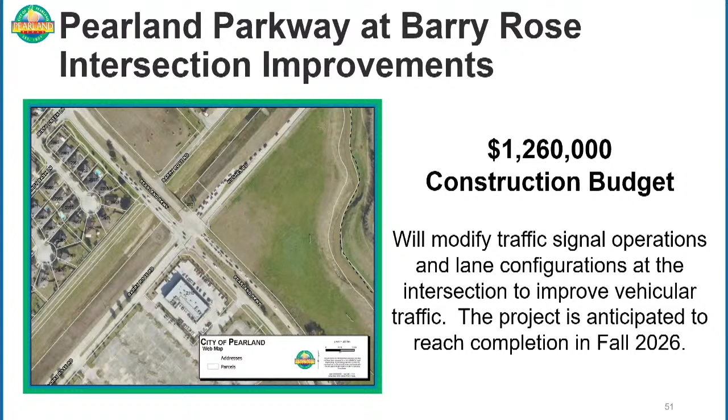Member Byram has a quick follow-up. Just one thing to share - I don't know if it's been relayed, but it's a good opportunity to relay it. The residents from Country Place reached out to me that you guys did a superb job on the sidewalk repair project that you did out there. So I don't get to talk to y'all all that often, so I wanted to share that with you and say thank you. And the residents are very happy with the work you did out there.